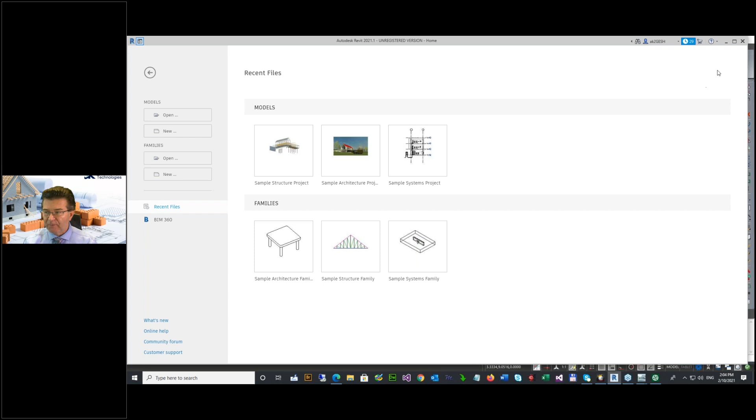So let me check what I have here. For example, this is an old project, and let me see it here using our internal viewer. First, I have to show you something.

If you purchase the program Print2CAD 2022 Ultimate, you will get on your desktop Print2CAD 22 Ultimate and, extra, CAD Direct LT. This CAD Direct LT is something interesting. This is a real CAD system based on DWG files, but we use this CAD system as a base for our conversions.

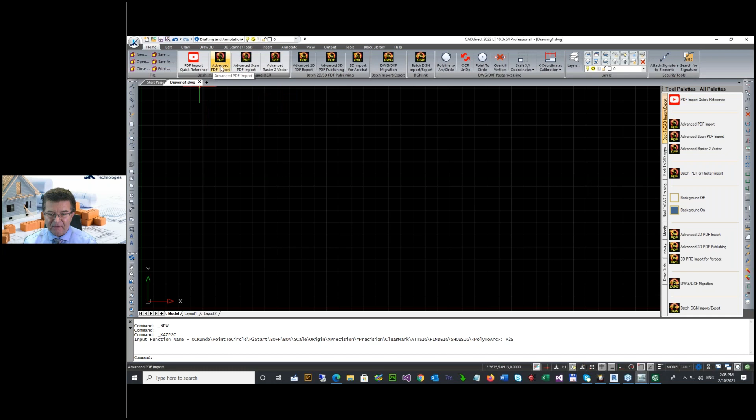For example, if you start the program, then you can open every drawing. For example, I open here an empty drawing. You see, this is a DWG drawing. And now, if you want, you can start the PDF import here. If you push this button, Advanced PDF Import, the program starts Print2CAD Ultimate, but this Print2CAD Ultimate is now integrated in this small CAD system.

Why you need the CAD system? I will show you, because during the conversion you need a lot of interaction with CAD, because you have to prepare this PDF. Let me show it. So first we check here the configuration. The language interface is English, but first what I'm doing, I put here in the configuration that we use the unit millimeter. What is unit millimeter?

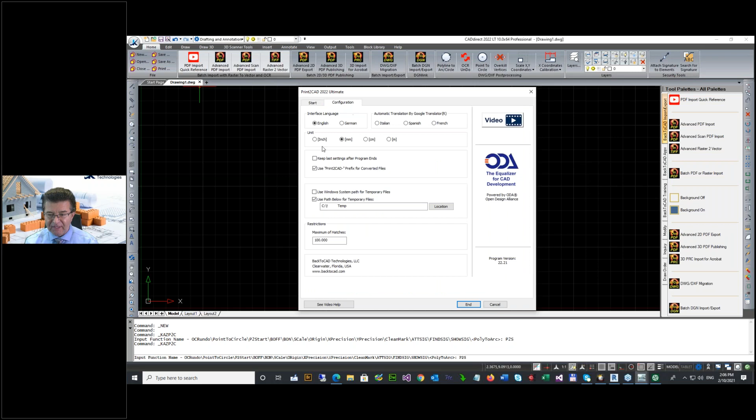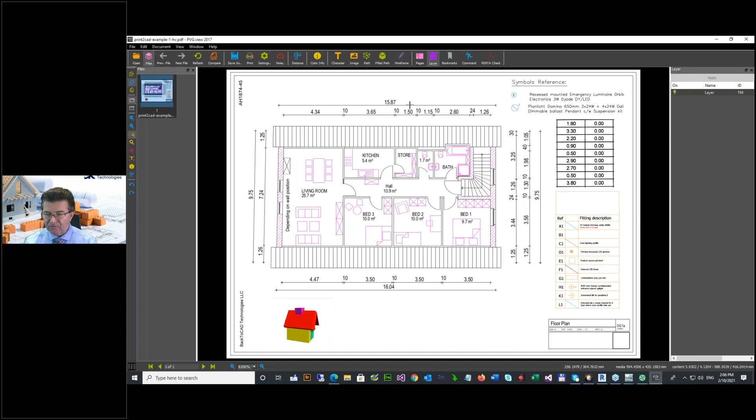Unit millimeter, later I will show you how you can work with inch. Why? Because unit millimeter is the base unit of PDF. And look what happens. For example, I select now a file like this and view this file with the help of our internal PDF viewer. This PDF viewer is really made for construction drawings, and you can measure a distance. Let me measure this distance, from here to here.

Let me go here, measure distance from here. You can do this with snap. Now let's snap to this point. Can you see in this window? It is 85.1359 millimeter. What is it? This is a big problem of PDF files. This is only a plot millimeter. The units or distances you can see in PDF are simple plot or print units, because PDF is nothing more than an electronic print.

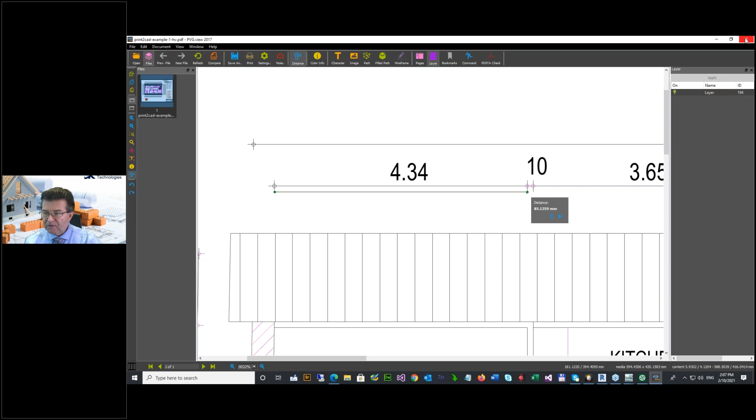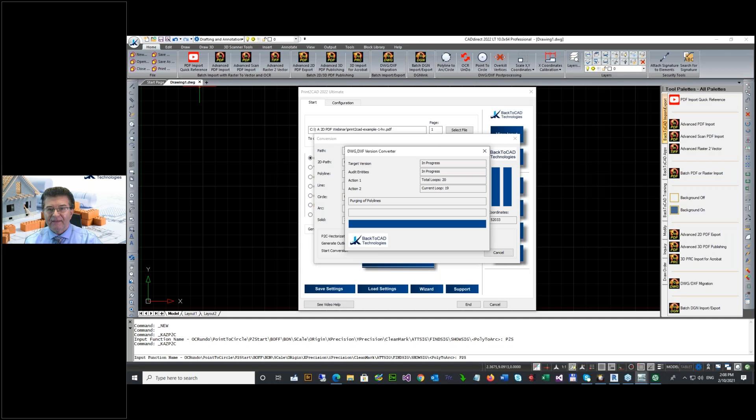And now, if you do nothing, simply convert, I'm converting now. We convert the PDF coordinates 1 to 1 into CAD, because in PDF we have no information about the original unit or the original scale of the drawing. And look what happens now. I import this in the drawing. You see, this is this file after conversion. We vectorized the table. This table was a raster picture. You can see in the background the raster pictures. But what I wanted to show you here only:

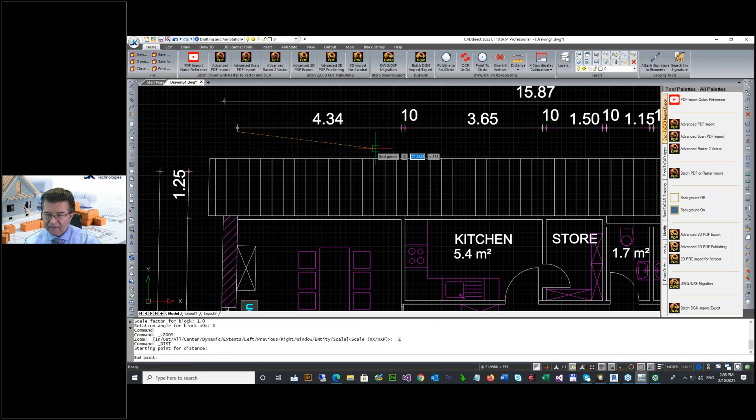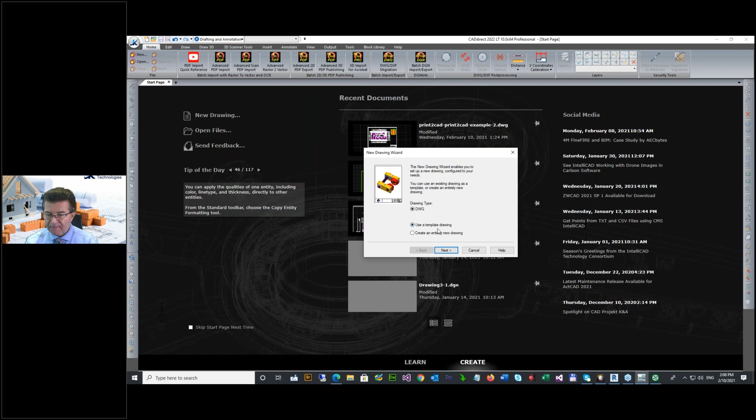Now, if I measure the distance, this is CAD Direct LT, and let me measure this distance. You can see this is exactly the same distance like you saw in PDF. These are plot millimeters. So what can we do now? Let me open a new drawing. New. Let me make the conversion again, I start the program and take the file. That is the same file. Good. What do you have to do now? Now you have to scale the coordinates.

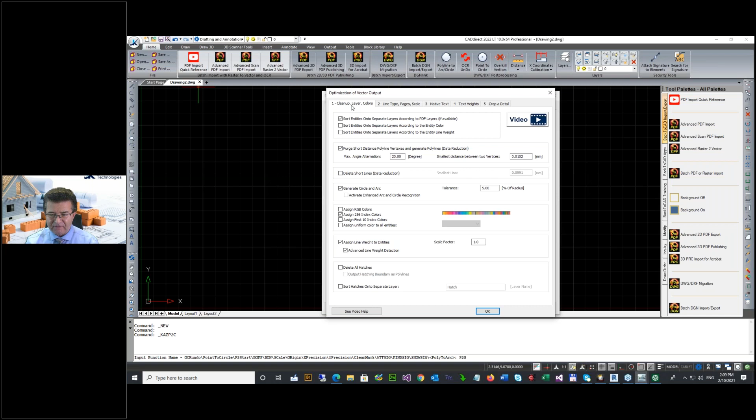Of course, you can go to optimization and scale the coordinates, because if you want to use it in Revit, you need the correct coordinates. Here you can scale the coordinates. Look here, scale factor for XYZ coordinates. But the faster and more precise way is scaling of coordinates with a factor. PDF measured distance is my 85.1589. This is what I measured in the drawing. And it has to be

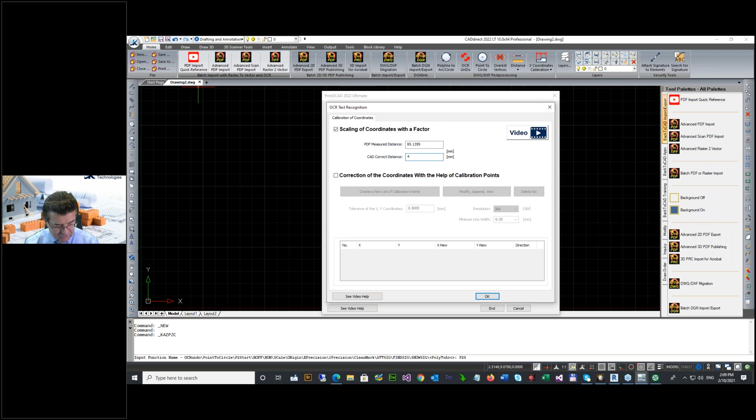4340 millimeter. Now, how did I find it out? Simple. If you go to view input, and I need this drawing in millimeter for Revit, you can see this is a German drawing, 4.34 meter. This is 4340 millimeter. And now I put in coordinates calibration the measured distance, and the program immediately calculates the factor. And now if I start the conversion, I will get a correctly scaled drawing.

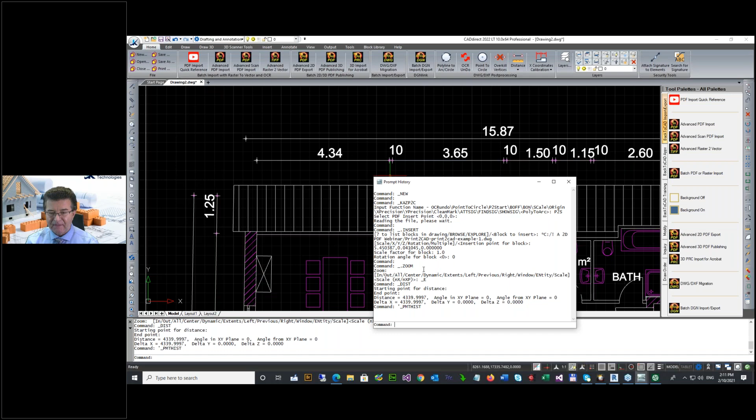Let me put it here now. This is the first step you have to do. So now, if you go here and measure this distance, you will get almost 4340 millimeter. You can see this is really the bad accuracy of this PDF. But look what happens. I will try now to scale this absolutely correctly. I go to scale reference, you will find this function under scale

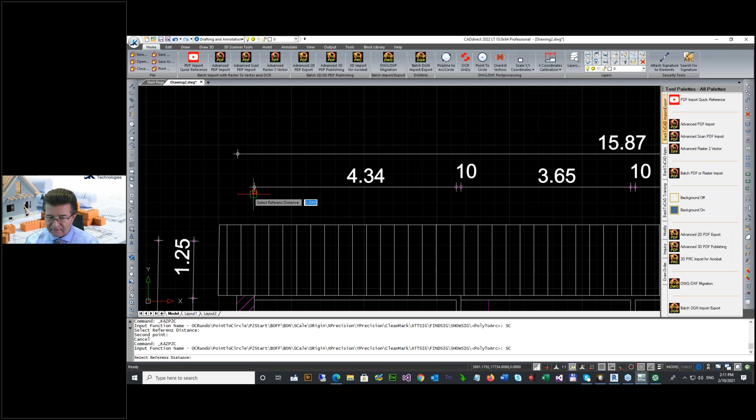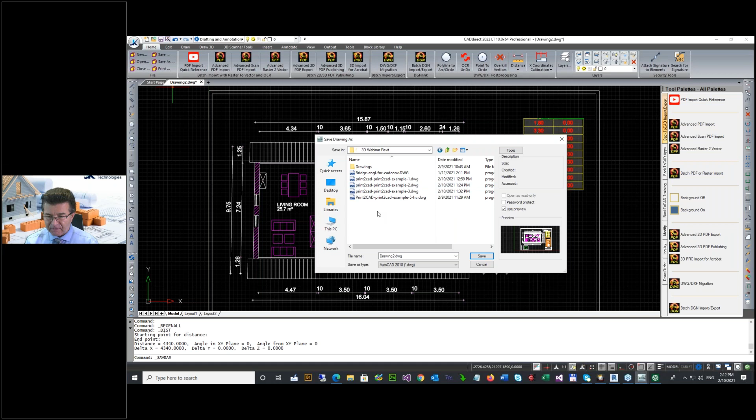reference. I scale it. I'm going here and put 4340. Let me check now. So now again distance. And it seems everything is okay, almost perfect. Let me save this drawing, and I will try now to use this drawing as an underlay in Revit. Let me go here. I save it as example 1.

And now I'm going to Revit, new, in metric. The next example I will show in inch. I'm not really familiar with inch as a German engineer. Now we are going under insert, import CAD, and now I will import this drawing. So there's the webinar Revit folder, and this was example 1. But let me check it. Context raster images.

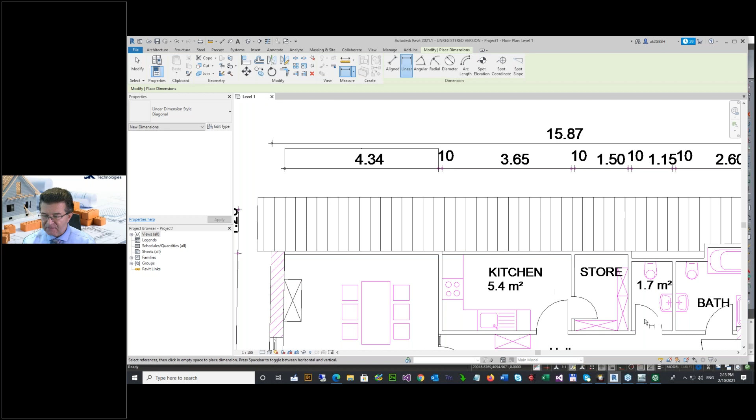Okay, so this is now our drawing. So let me measure here now. Let me measure this distance, and now, a moment, I have to do something a little bit more, because you see now I can't really see the distances. Why? Because this is something we have to do with this drawing.

Because in PDF files, we have no information about units. We have to set this drawing to the correct unit. You do this under Set Unit. And you see, this was an incorrect unit. And I set now the correct unit: millimeter and decimal. Okay, and I save it again.

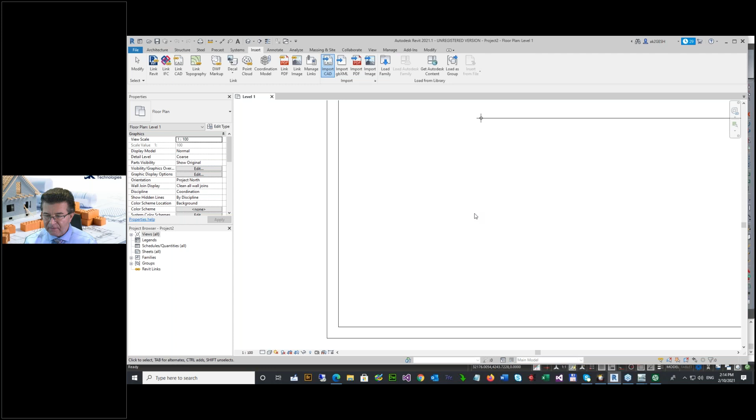And you will see now Revit will immediately find everything correct. So this is very okay. Going here on Import CAD, and again example number 1. Okay, and let me check this distance now. On Modify, Measure, and let me measure this distance. Now you see everything is correct.

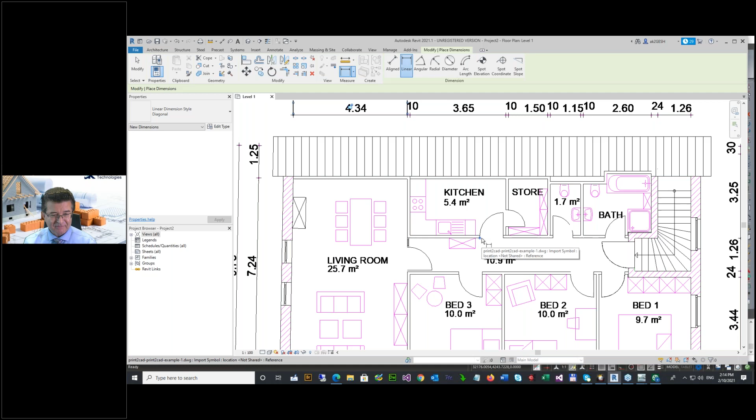Okay, this is 4340. And now maybe you have the idea you can use this drawing for very fast generation of your walls in Revit. This is a bad idea. Look, if you measure this distance, a moment, I have to measure it again so I can snap the correct point. Look, instead of 3650, you will get 3 millimeters less.

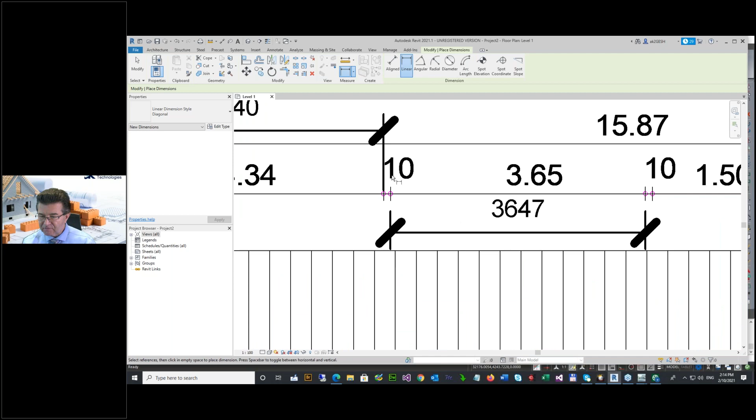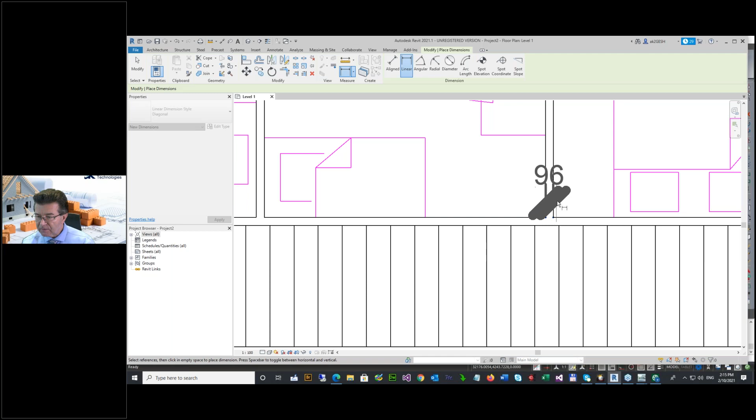Let me check the walls. For example, this wall from here to here. Okay, this is 100, but let me check this wall. It has to be a 100 millimeter wall, measured from here to here. Okay, but let me check this wall, measured from here to here. 96. Right, you can't use it because the accuracy of this PDF file was too bad.

How did it happen that we have this kind of inaccurate PDF files? So I'll show you something. Let me check a lot of samples of PDF. Let me start Print2CAD again. Okay, and now I will take another drawing. So I will select this drawing here. I will check this PDF. View input. Okay, and now I will zoom into this detail.

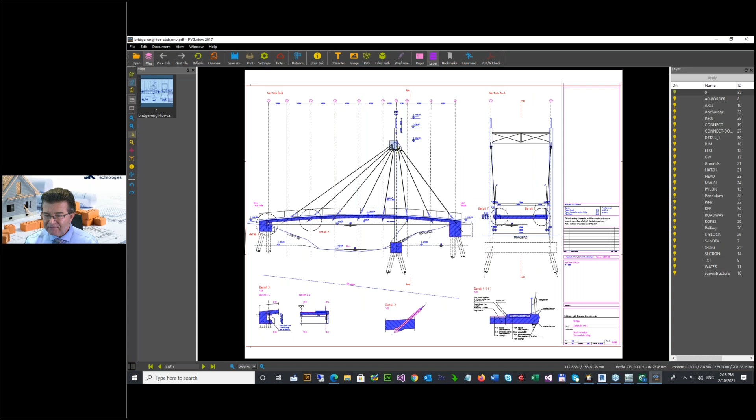Okay, can you see how it looks? It was really perfect. But the line weight covers the true shapes of these lines. This is the reason that in our PDF viewer, you can always go to wireframe and switch it off. And now look, if you zoom again, you will get this PDF as wireframe with no line weight. And you can see the precision of this PDF is really good. This is CAD precision.

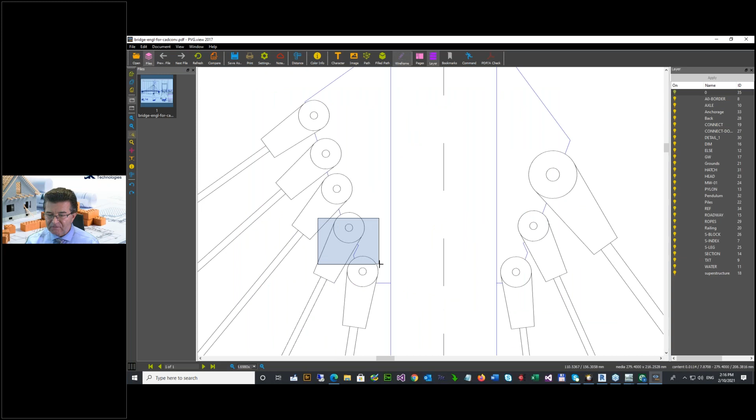It means if you want, and if you have the tools, you can make a PDF file with astonishing precision, with CAD precision. And if you import this PDF, or you convert it into CAD and import it into Revit, you can immediately snap the walls and work on it. But let me look at this PDF, the one we are working with now.

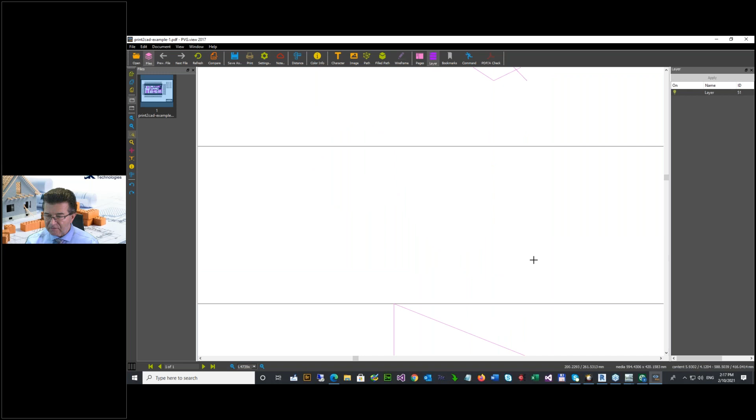Look, you can see the quality of the PDF if you zoom into a detail. Let me zoom into this detail. Look, so what's going on? Why is the circle in this shape? This is because this PDF was made by a very cheap tool. This PDF is made via a printer, in a 300 dpi raster. And what you see here are the raster points.

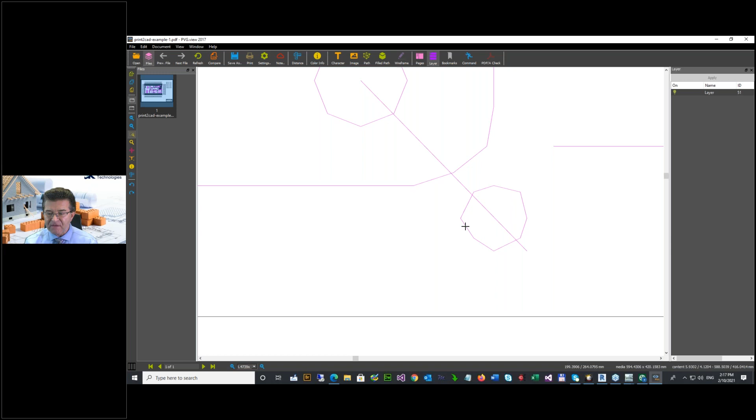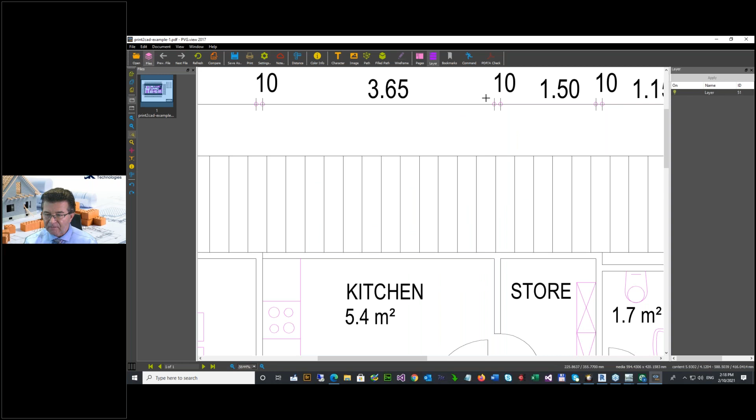If you make a PDF in a 300 dpi raster, nothing can have coordinates in between. And this is the reason you now have this terrible quality of every circle. Look at these arcs, and you can imagine what kind of terrible coordinates you got. If you have these kinds of circles, you will get the same kind of coordinates here. Every coordinate, every part of this drawing is simply very inaccurate.

And now, if you want to use this drawing in Revit, you have to adjust it to the correct coordinates. One possibility is, yes, you construct your walls, you snap the points, but every time you check whether this distance is correct or not. This is a lot of work, because maybe you can see the distances, but if you work on this drawing, you will never be sure that you catch a correct distance. You can't really use this PDF or this underlay to construct in Revit. You have to do something, and this is our new tool.

We offer something new in our program, Print2CAD: the possibility to calibrate the coordinates. But very important: before you calibrate the coordinates, always go here and set the correct units and the correct unit types, because we can't find them in the PDF.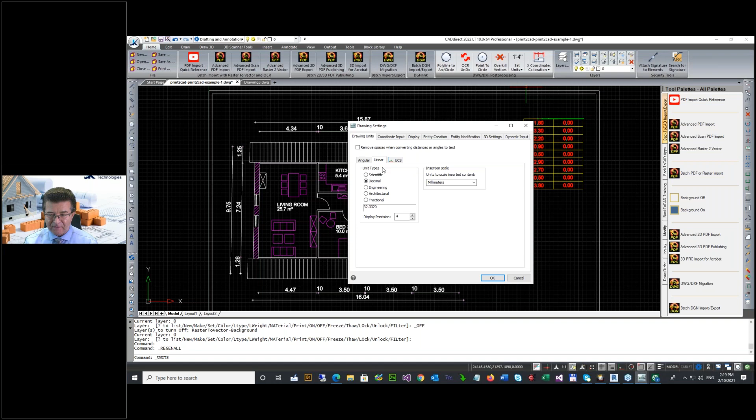And look what's happened now. Now, simply go here on coordinates calibration, okay? And you can input here the precision, and the tolerance, and simply catch here the points of the dimensions. And if you see, if we offer you here the correct distance, then simply press enter.

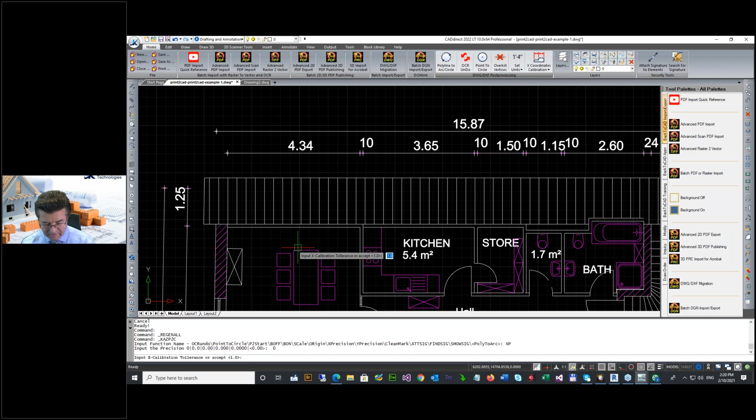Now here, moment, I have to check it now here again, coordinate calibration. I will put precision to 0 because we have millimeter, okay, and tolerance to this, and let me check it again, okay. Now we catch from here to here, okay, 100 to here. This has to be 3650. Okay, now we catch this point. It has even 100. You see how inaccurate the distances are.

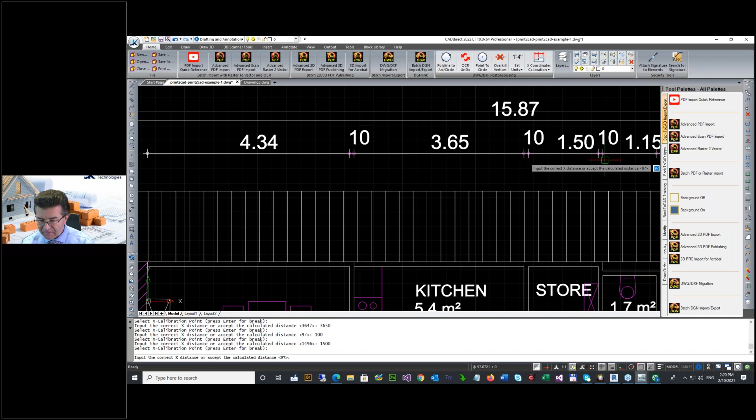Now we catch this point with 1500. Okay, enter. And now this point, it will be the 100. Okay, and you can run here the full dimensions. Okay, so that you can... 1500, 150. No, come on. Okay, back. Okay, so you can run here the full drawing.

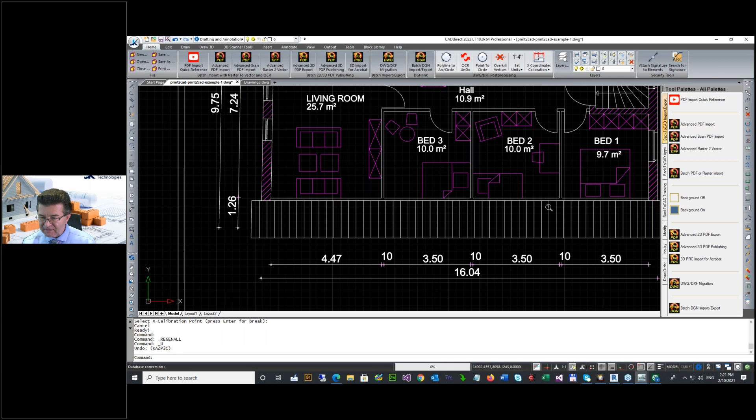What you can do, because you see, very interesting is that this calibration does not calibrate only this dimension, but this drawing itself too. Let me do it, for example, here from this and this distance. Okay, we go here again on calibration, precision, and here, and we calibrate. This has to be 100. This has to be 3500. Okay.

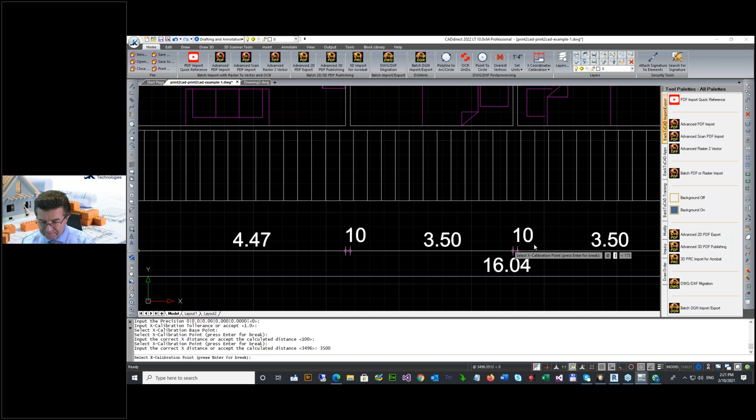Now, okay, I have to do it again. I have now here a little bit of a problem. Let me measure this distance here again. Distance from here to here. You see this is 9.6. Can you see it? 9.6. Okay, let me calibrate it again. I can't really calibrate here because I need two hands for it. 100 again. Okay.

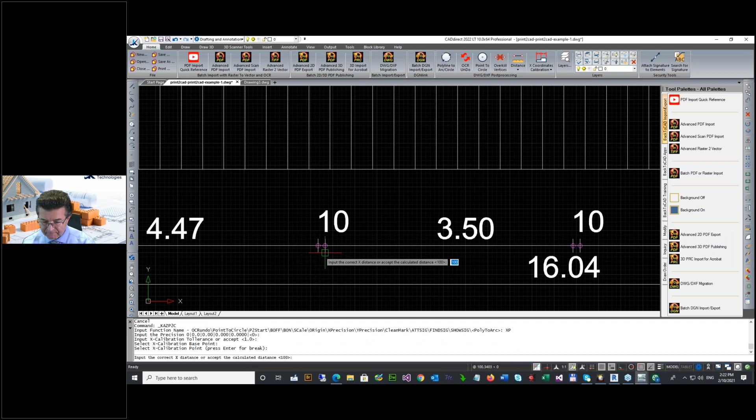Now here. Calibration. Okay. Now from here to here. 100 to here. 3500. Till here. 100. So let me do it here. The last one here. 3500. And here 100.

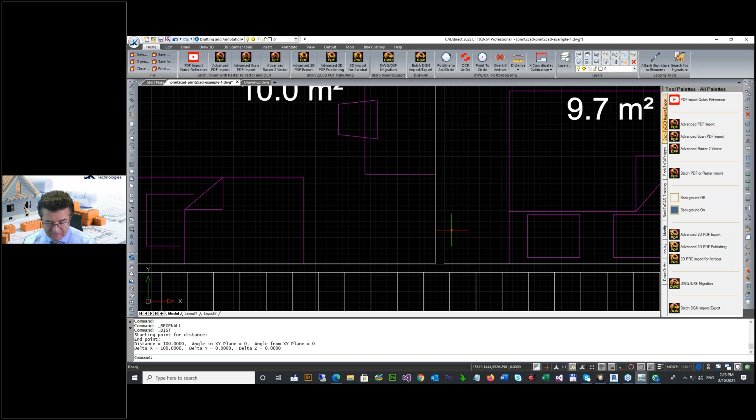Okay, let me stop it here because I want to show you. So the calibration of these distances does not change only this distance, but calibrates everything here in the drawing too. Now let me check the distance for this wall from here to here. Okay, now you can see this is precisely 100. And now you can apply the same method, for example, here on the doors, because you don't have any information about the doors.

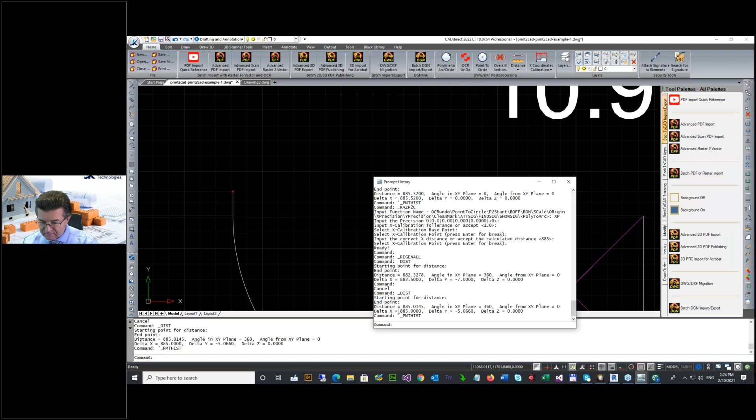Okay, now let's measure this distance. From here to here, moment. I have to check only this correct distance from here to here. But you have to look at this X. You can see the X distance is exactly 885. Okay, so now you can use this, for example, for the walls.

If you can see, for example, here, you measure this distance, and you can see this has to be 100, but it's less. You can correct it. Go here, simply, and correct it. From here to here has to be 100. Now, okay, I'll show you something. You can see now here in distance that we have precisely 100.

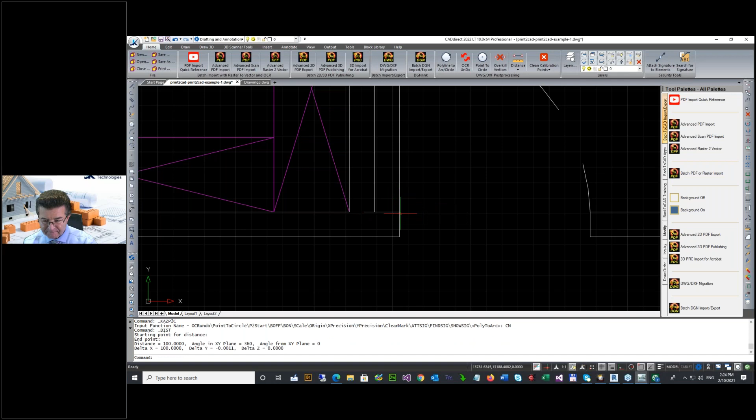Can you see? Okay. And now it takes maybe 10 or 20 minutes to clean up this drawing, to put the correct distances, but it's very important. So now you can save it as drawing 2, okay? But I didn't prepare everything here, so let me check how it was looking. I was doing it today with more samples. Okay, let me check it now.

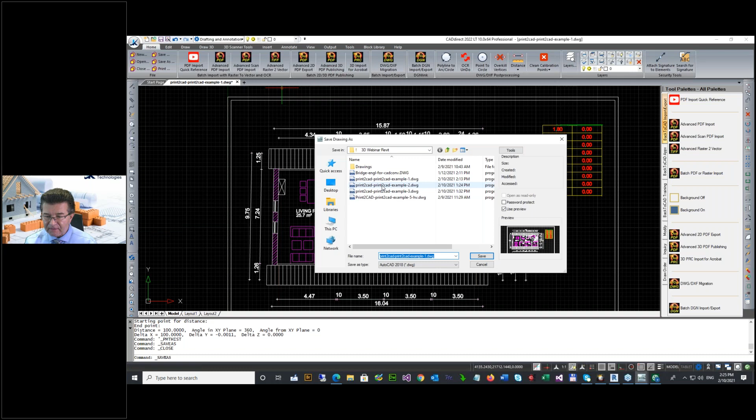Metric, and let me import now here. Okay, sorry. File, save as, again, save drawing 2. Okay, now I'm going here on insert, import CAD drawing number 2. Okay, so let me check now the distances.

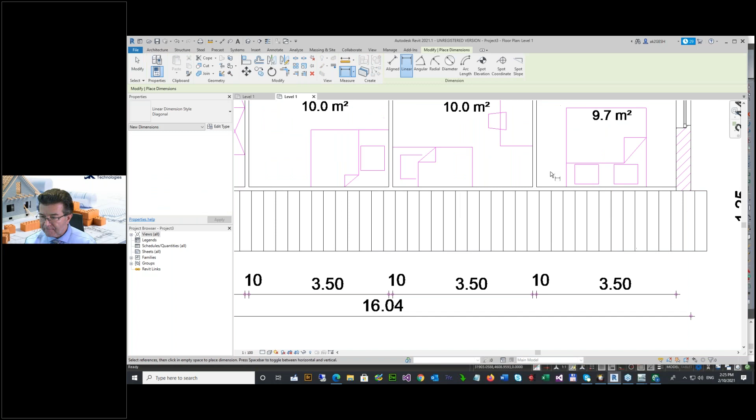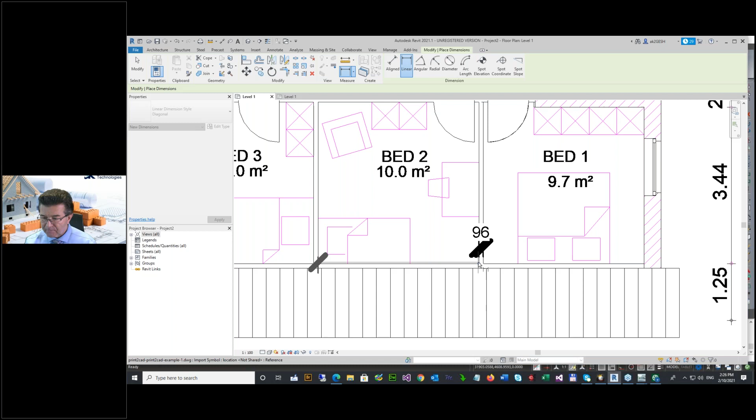Look, now if you go here and modify and measure something, like we measured this one, you get exactly 100. Compare it with this drawing, it was 96. Now if you measure this distance here, from here to here, look, exactly 3500. Let me check what was here before. Distance from here, oh, this was okay, but I think here was not okay. Let me check this distance.

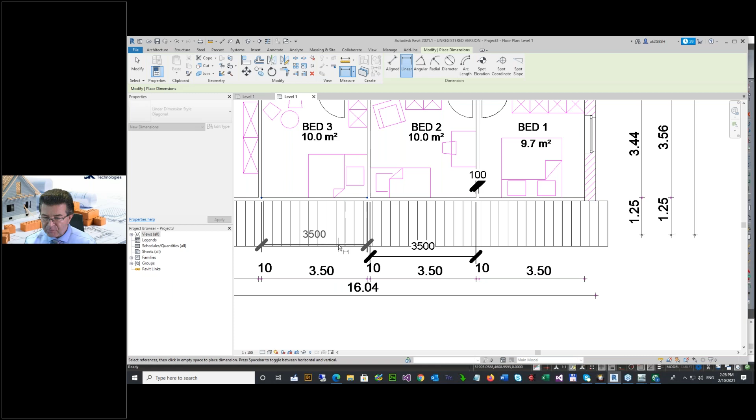You see, this was 3496. Now after this adjustment using these dimensions, if you measure here, you will get precise 3500. And let me measure, for example, this distance here. So linear measure from here to here. We have exactly 100.

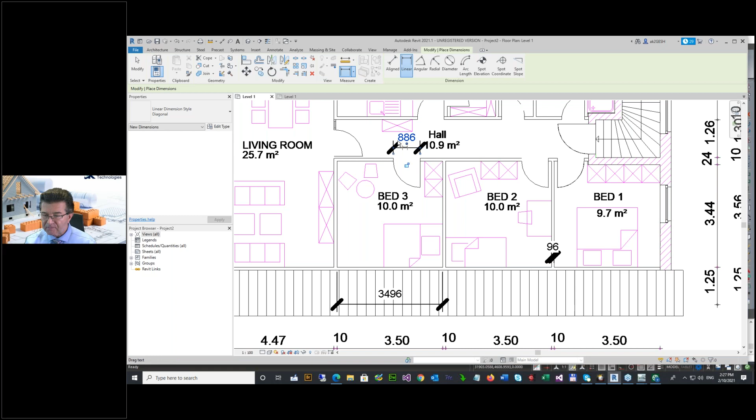Exact. And now let me measure these doors from here to here. 885. If you measure now here, let me check it here. I think this was broken. You see, it was 886. Can you see it? And now you can see, using this, you can correct all coordinates. Now you can use this underlay simply for snapping of your walls in Revit, and you will get a beautiful drawing.

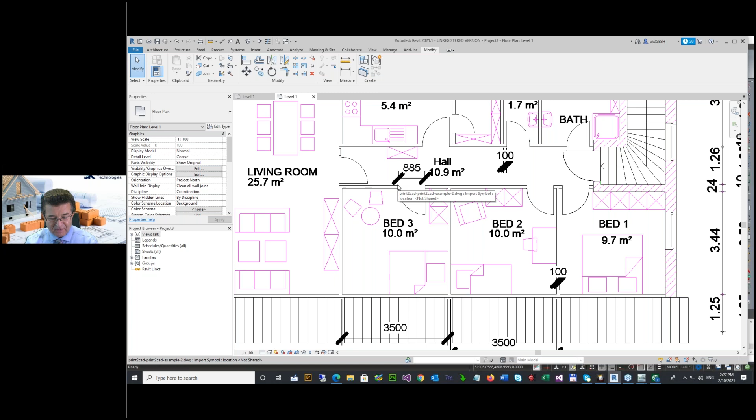This is a big difference between a correct model or a bad model. And believe me, about 70%, no, 75% of PDF files are very inaccurate. But I am going to show you a little bit more. What happens, as a last subject here, if you get this kind of drawing from a scanner?

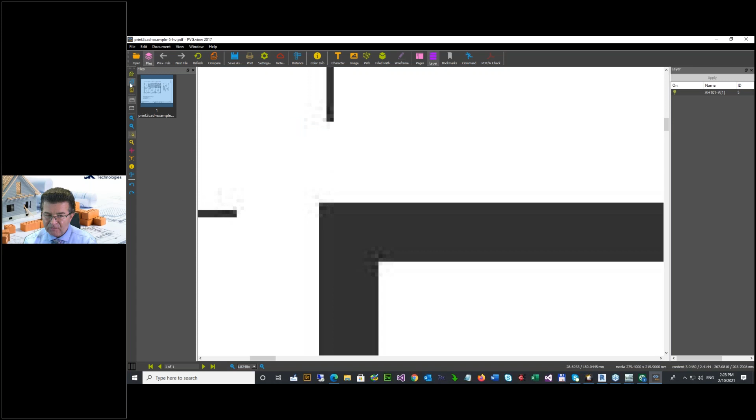Select file. Let me take this one. View import. Look, this is a very bad quality scan. If you see here, this is a simple table here. Now, because we use inches here, first I'm going to my configuration and switch here to inch. Okay. Start the program again. Now I select this file again. Okay.

I will now simply convert this drawing, but if you want to snap the walls in Revit, we need this as an outline. And with conventional software, if you vectorize, because this is a raster picture, only one huge raster picture, you will never get an outline, because normal programs are not able to see that this is a wall and this is a window.

But we have a very special function. I show you here. You have to go now to raster to vector, and for Revit, every time choose the function center line tracing and solid tracing combination. Why? Because with this method, we do not vectorize text. If you have something from a scanner, you need this text in Revit, because you have to know the number itself. You don't need to apply optical character recognition on it. Of course, you can do it too, but you can use our solidization.

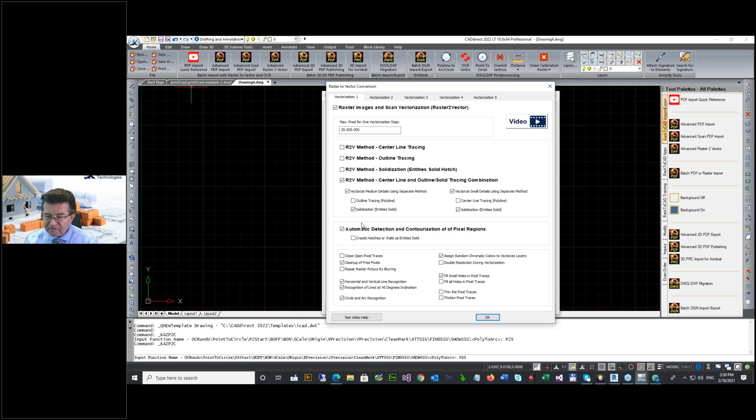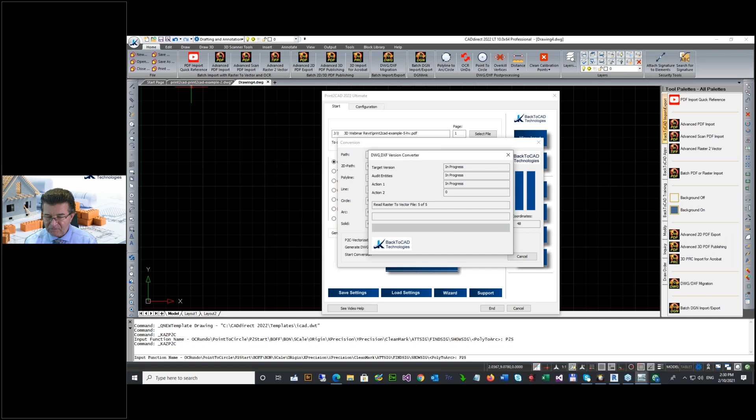Okay. Now you can go to a very important function, automatic detection and contourization of pixel regions, and here create the hatches or walls as entities solid. This is simple wall detection in this drawing. You will see this was perfect, and now you can use this wall detection for your Revit, because using raster to vector, we detect where the walls are. This is a perfect function for Revit. Okay, now the program is running raster to vector.

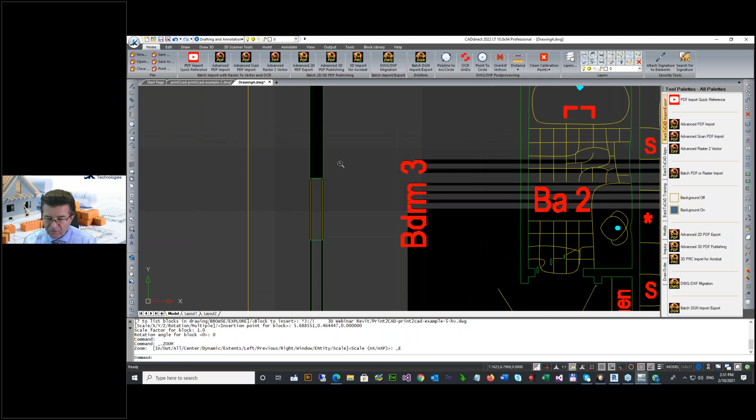And okay, let me check now the quality of this drawing. Look, in the background we have the original raster picture, and you can see we were able to disconnect this wall from the window. We can see it here too. And now, if you want, you can separate the walls. I switch the background off. Now you can see we were able to separate the walls on one layer. Now we have walls, and now we can snap the walls in.

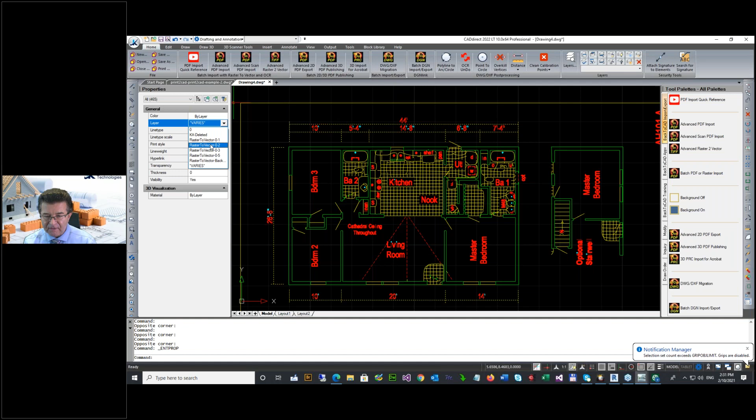But if you want, of course, you can move this dimension, because you'll need it later in Revit. Go here and I move symbol on the walls. Now I switch off everything, because I need only the walls. Look, now we have the walls and the dimensions, and you can see the numbers we do not vectorize, so that you can see them perfectly later in Revit.

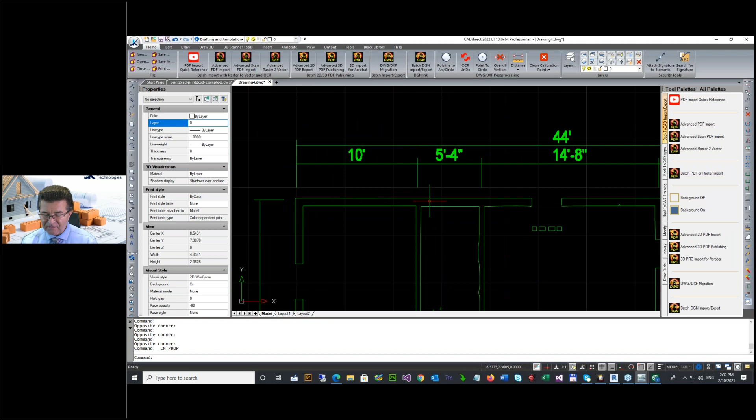If you generate the walls here using this raster picture, you still can't snap it. Why? If you measure this distance, look, you will get something wild. This is 125. So a very important step before you go to Revit is to set the units. Now we set the inches. This is correct, but we need the architectural unit types. Let me measure it again. Distance, and you can see that this is not 10, this is 114 inch.

Again, this is only a plot inch. If you want it, you have to scale it. Now we scale it, and this is our reference. And this reference gives us 10 feet. And now, can you see it here in this window? I use now the architectural annotation, and if I measure this distance now, you will get exactly 10 feet.

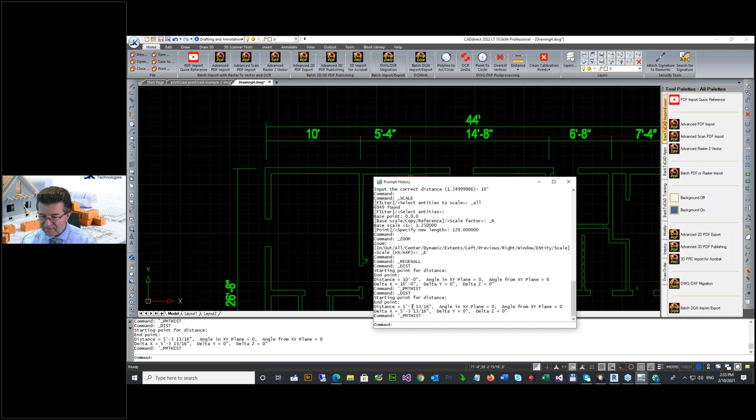Okay, but now if you measure this distance again, you will see this is a mess. 5 feet 3 13/16. You can't use this in Revit to snap the wall, because this is terribly inaccurate. So you can increase the accuracy using our function again. For example, I'm using this for the horizontal lines. Input precision is 0. Tolerance, let me make 2 inches. Okay, now snap.

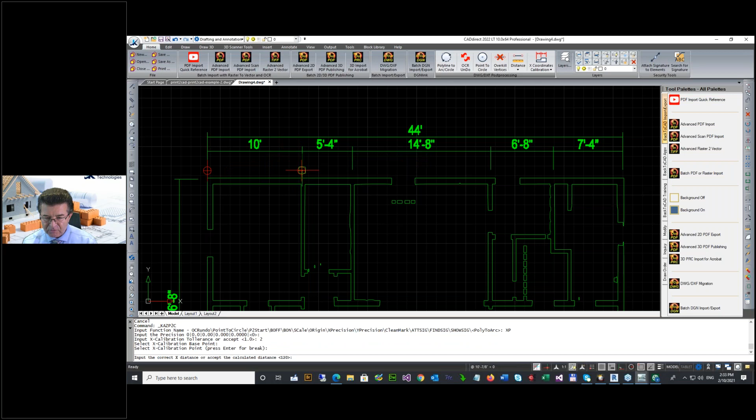Oh, wait a moment. I want to show you something. Look here. Okay, again, calibrate coordinates. Okay, 0. Let me make 2 and snap, and 120, or you can write 10 feet. Okay, snap to it, and here 5 feet 4 inches. Can you see? And here snap, and it will be 14 feet 8 inches.

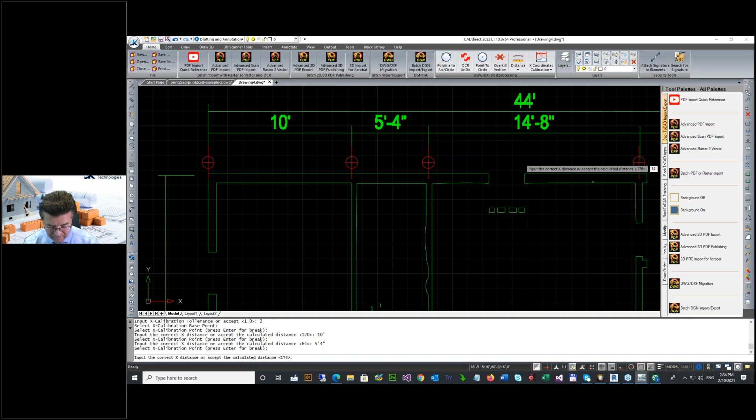Okay, and you can go through the full drawing. Here is only the information we just calibrated. You can go every time here on Clean Calibration Points. We have no time here to do everything for the drawing, so I'll stop it now here and go here on File, Save As, and I will save as drawing 3.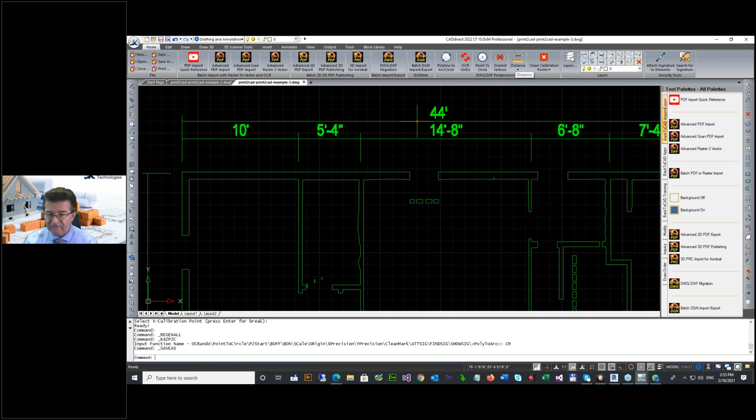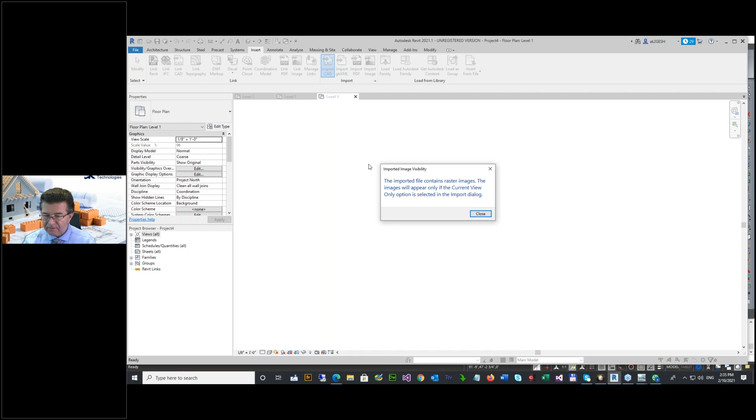Okay, and now you can see we have the correct unit, we have correct distances, and this is now the perfect underlay for Revit. If you go now here, Imperial, okay, and now we can go to Revit and go here on Insert and Import CAD, and this will be drawing 3, okay, and now you can see.

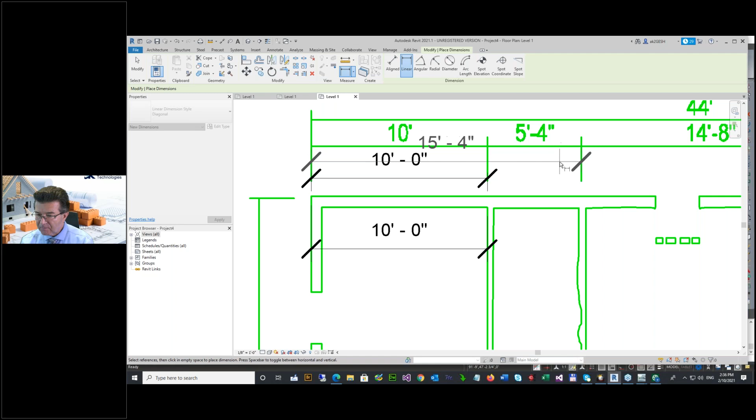Oh, this is all green. You can really see it, but let me check it now. This is okay. This is now here our drawing, and let me check now here the distances. Measure the distance from here to here, exact 10. Let me measure distance from here to here. You can see perfect 10. Perfect. Now measure from here to here. 15, 4. Perfect. Exactly like here in the dimensions.

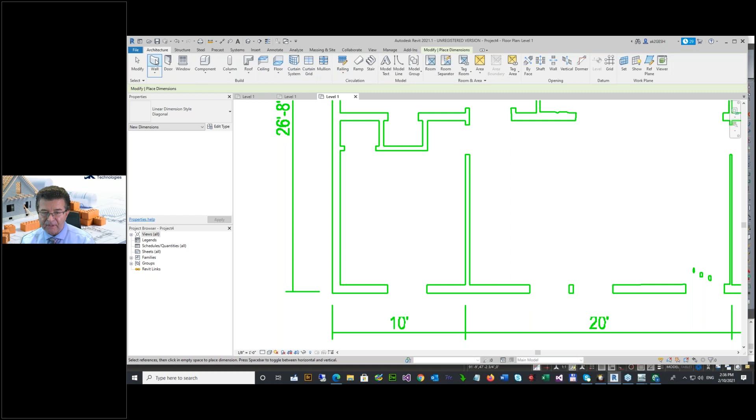So, of course, you have to take care of all distances, but you see, we separated the walls for you. You can erase it, you can snap it now how you want. Maybe you will adjust only the distances you really need, and everything else you can use here and snap it here. Like if you go here on Architecture, Wall, and now we can snap here. But I have to use here the correct wall definitions and everything. You see, now you have the perfect underlay for your constructions, and imagine it was before this simple.

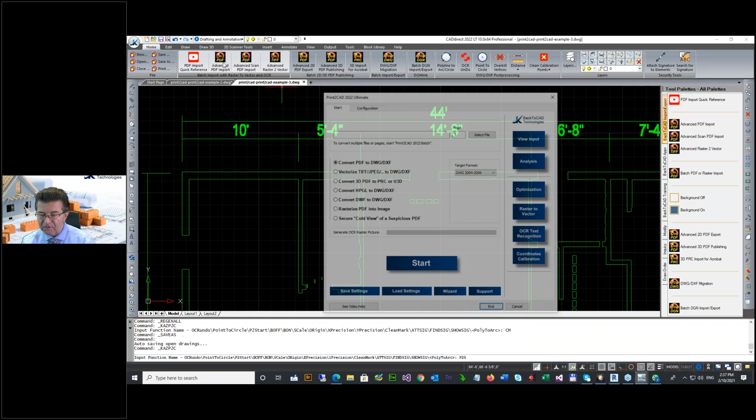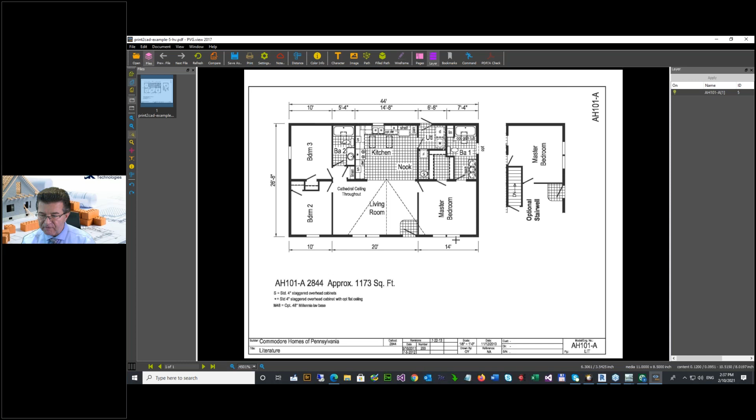Again, we look here on this drawing, select file. It was this terrible quality of scan. You can see here. If you see here, oh my God, I can see the pixels. There is very low resolution, but we were able to give you a perfect underlay now for your Revit.

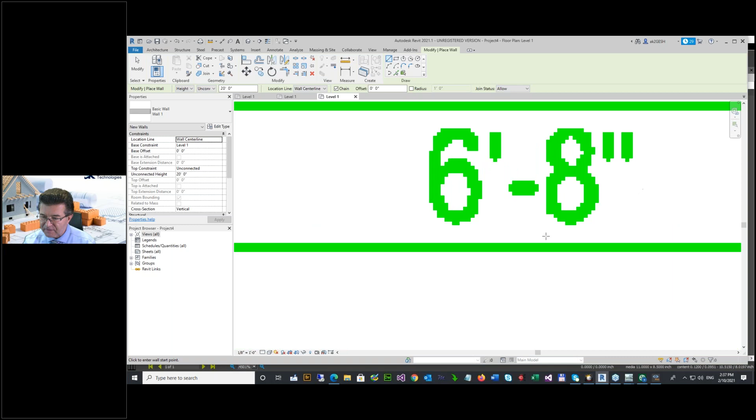And very important is here, you see that the numbers are not vectorized, so that if you now need the construction, every time you can see here the original text from the raster picture, because this text is still rasterized, not vectorized. These are vectors, and these are the simple solids, what you see here. This is a very important thing.

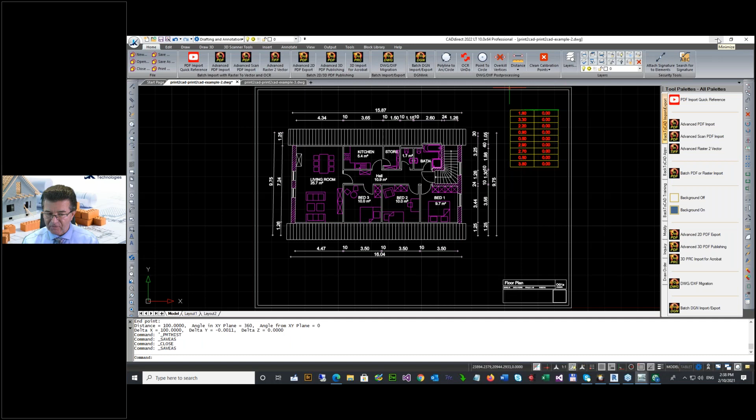Okay, thank you very much. That was everything I wanted to show you today, how you can use the program Print to CAD if you want to make a precise underlay for CAD, for Revit. Again, what you have to do after you import the drawing, you have to scale it, and here you will find first the possibility to set the correct unit. This is the possibility to measure distances and here to scale the drawing with global factor.

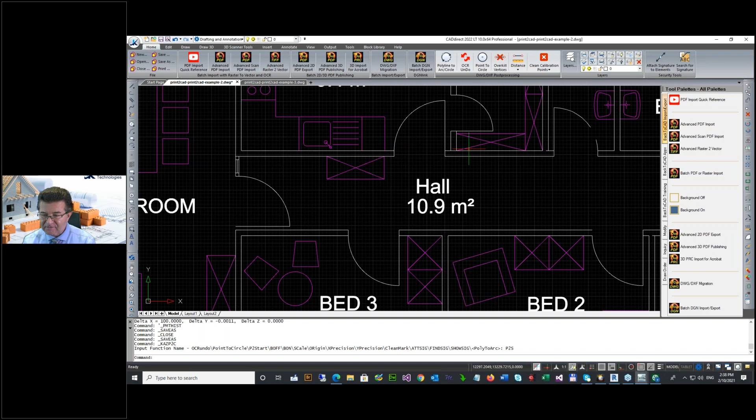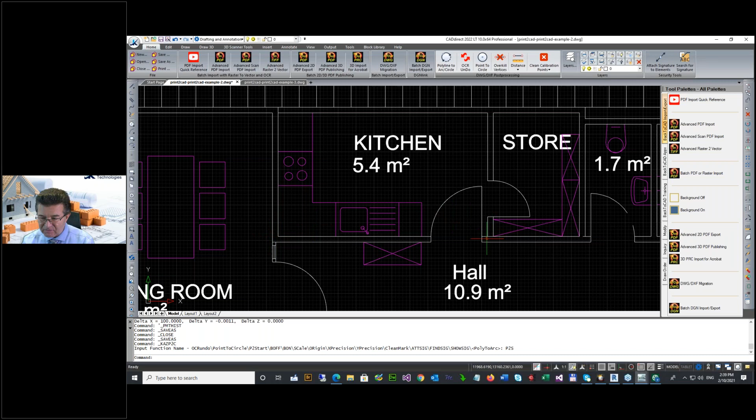And here you will find the possibility to change the accuracy of the drawing, to make it more accurate using not only the dimensions. This is simple. Give the correct distance and the program takes it and moves it. For example, if you give the correct distance between this and this, we not only change the distance between these, but we change this and this too. If you give the correct distance between this and this point, we will not skew it, but we correct this distance too, and this distance too. We will correct everything in the drawing.

This is a special artificial intelligence method for adjustment, and we'll never change any horizontal and vertical line, and we'll never change any right angle. Okay, good. This is everything I wanted to show you.